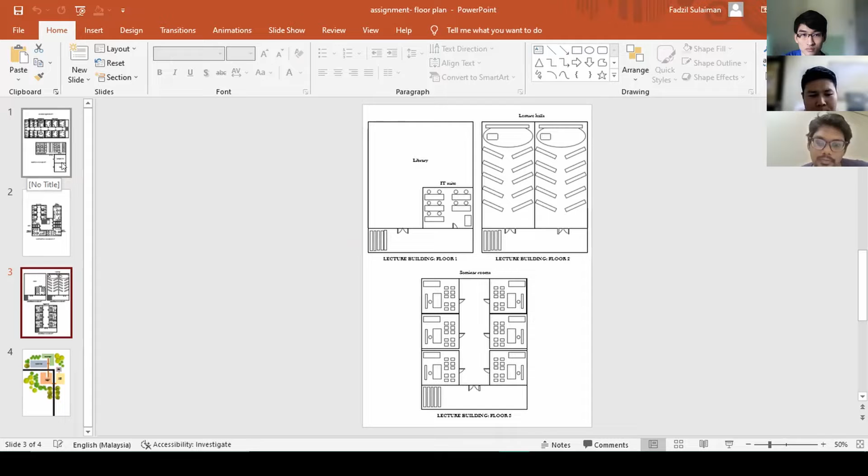So we start with the accommodation building. As you can see here, this building consists of 3 stories of the same floor plan.

We have provided 6 single rooms and also 6 double rooms for each floor. The total number of occupants for each floor comes to 18, and the total number of occupants for the whole building will be up to 54, which caters for 4 extra students.

We also provide a common room which can occupy up to 13 students at one time, and the kitchen, which can provide the required facilities for cooking for 6 students at one time. So the total number of occupants for the accommodation building goes up to 54 students.

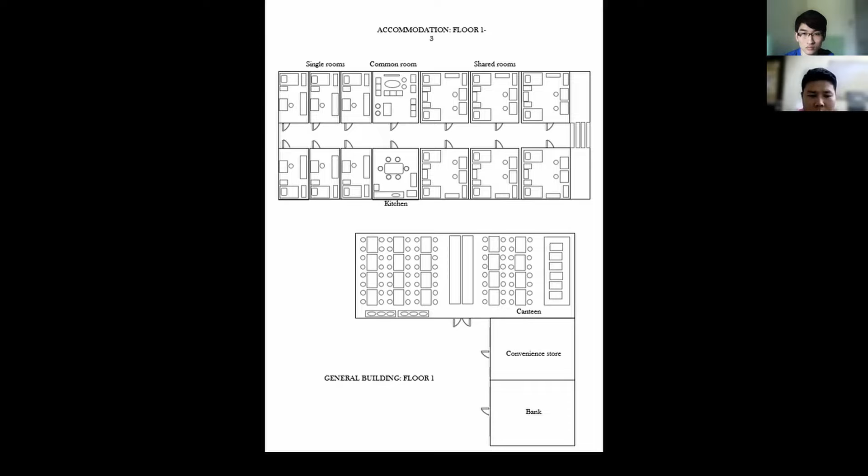Next is the laboratory building, which has 4 stories of the same plan. Here we provide 6 office rooms for the researchers, and also 3 main laboratories, which are physics, biology, and chemistry. Each laboratory can occupy 8 researchers at one time.

So the total number of researchers that can occupy the office rooms goes up to 24, and for the laboratories, the total number of researchers for the whole building can go up to 96.

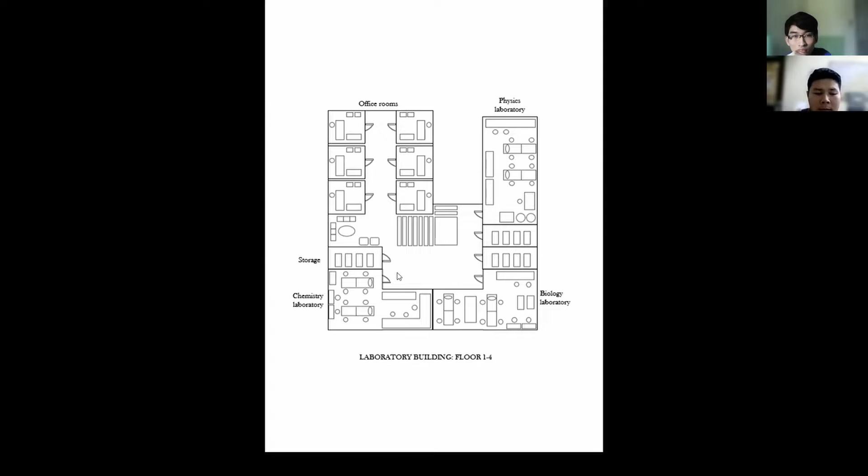Next is the last building, the lecture building. The first floor consists of the IT suite, which can occupy 10 researchers at one time, and behind here we have the library.

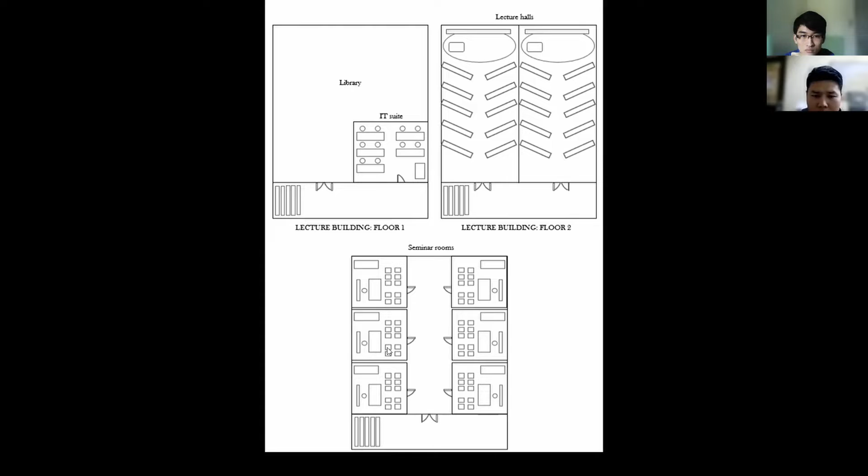Next we have two main lecture halls, each can occupy up to 50 students and one presenter, and lastly the seminar room on the topmost floor, which can occupy up to 30 students at one time. So this is the arrangement of all four buildings.

We put the accommodation and general building close together, with the main road crossing through the whole campus. Here we have the laboratory building, and opposite it the lecture hall. All buildings are connected by walkways since they are within walking distance, and one main road crosses through the whole campus while keeping the biodiversity of the site intact.

As we can see here, we do minimal land clearing for the campus. That's all from me. Do you have any questions? No, not for me so far.

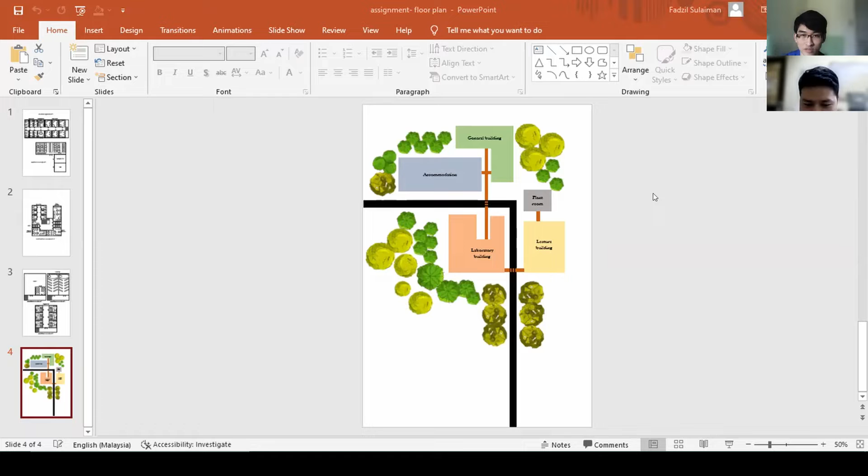About the energy production, our main requirement for the project is to let the campus self-sustain in energy and have a low impact on the nearby environment. Before going on to the design of the energy production system, let's look at the energy consumption of the campus first. Our client has provided us with the energy consumption of the facilities on their main campus and their historical consumption.

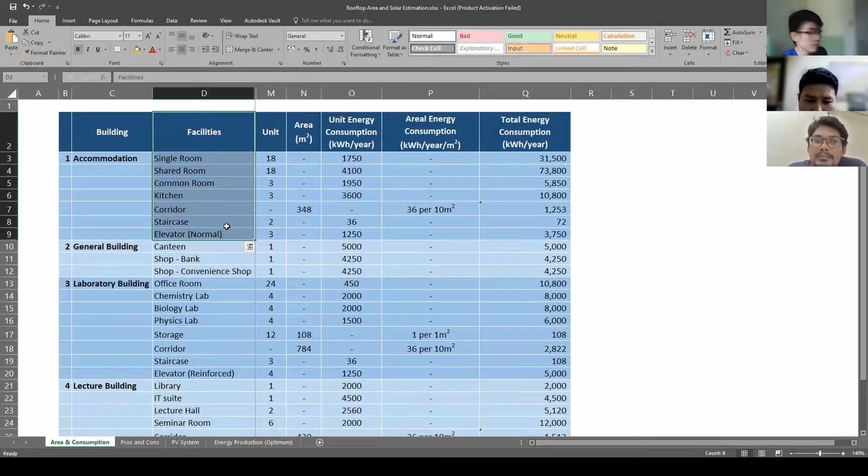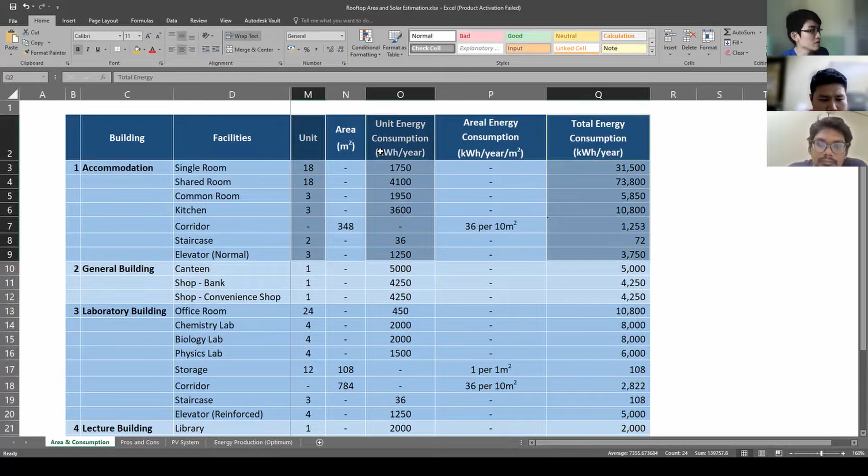Based on the facility list provided by Fadzil, I have estimated the total energy consumption for the campus. We know the unit and area of each facility, so using the data from the client, I multiplied the unit by the unit energy consumption of the facility to get the energy consumption, and did the same using the area of the facility when unit data wasn't available.

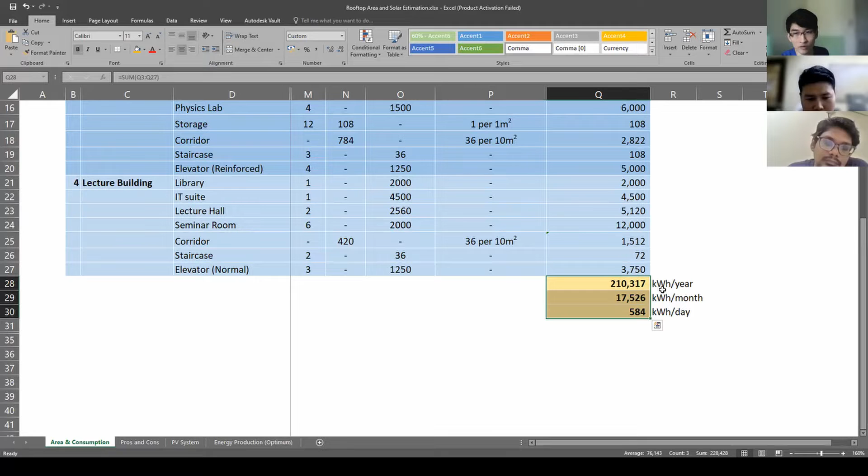After this calculation, what I get is the campus will consume about 210,000 kilowatt hours per year, equivalent to about 580 kilowatt hours per day. With this energy consumption figure, we can go on with the design of our energy system.

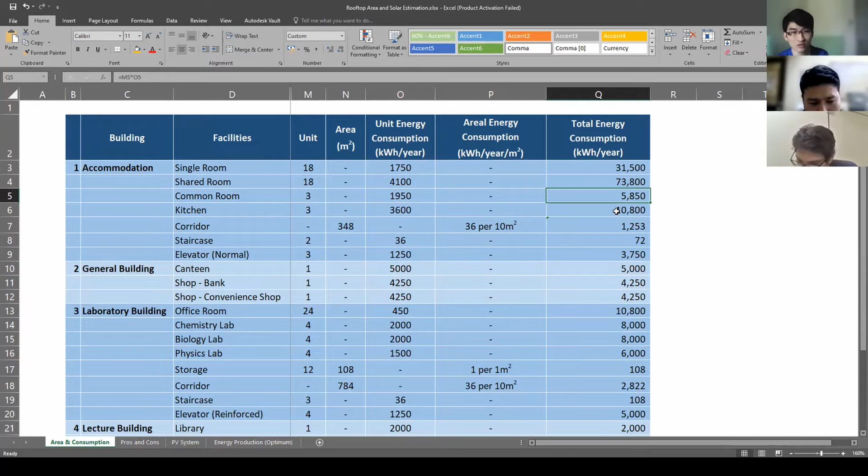Our client has provided us with the technologies they suggested: solar, wind, biomass, radioisotope thermoelectric, and geothermal. After our department discussed this, we would like to suggest using solar energy as the technology for our campus, because we analyzed their pros and cons based on environmental impact.

There are mainly four factors we looked at: emission during operation, whether there is waste generated during operation, whether there is noise pollution during operation, and whether the technology requires additional land clearance.

For emission during operation, quite a lot of renewable energy sources pass this criteria, with biomass as the exception. So we already excluded biomass from consideration because we need to put the energy generation facility on site, and the emission would affect the health of students and research scientists on site.

About waste generation, biomass and radioisotope have waste, others are okay. One important factor is noise pollution, because scientists and students need to study and conduct research on site, so we don't want any noise pollution. The only two technologies that pass this criteria are solar and radioisotope thermoelectric.

But then the last factor, since our client needs a low environmental impact, the only one that passes this criteria is solar, because solar can be installed on the rooftop, while others require additional land clearance. So our department would like to suggest we use solar for the technology on the campus.

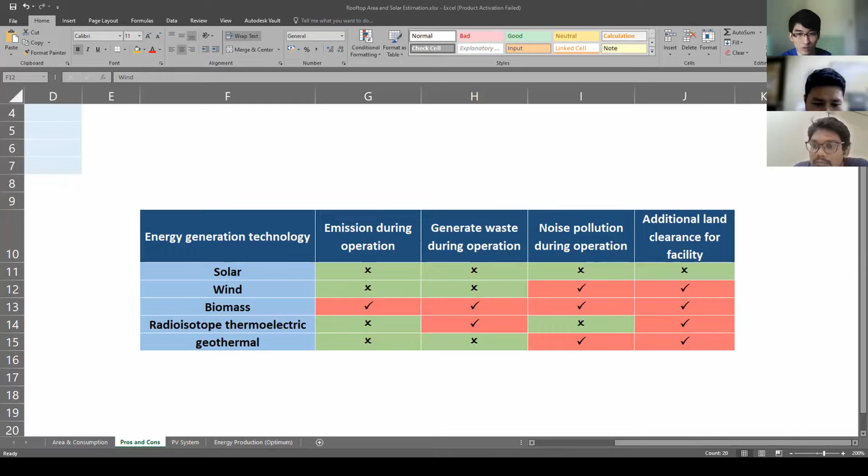Now that we've decided on solar as the main energy technology, I have a question for Fazil. When you showed the site map earlier, I want to ask whether the site orientation is already decided - for example, is it fixed, aligned to the north-south direction, or does it have some rotation? You see the screen, right? Yes.

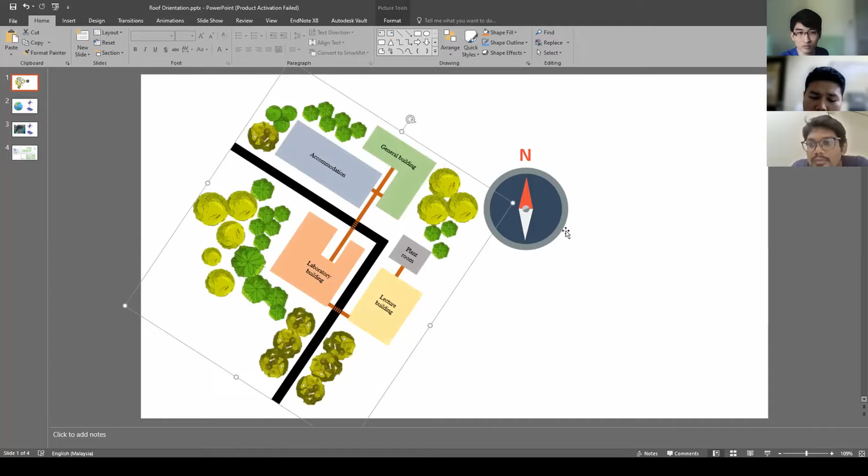Actually, we haven't decided on the orientation of the site yet. Great, so if I suggest some orientation, will it cause any trouble, or is it okay to change to any orientation? It's okay, yes.

And about the roof angle, what will be the roof angle used for the campus right now, and can we change it? That also we haven't decided on yet. Okay, then that's great.

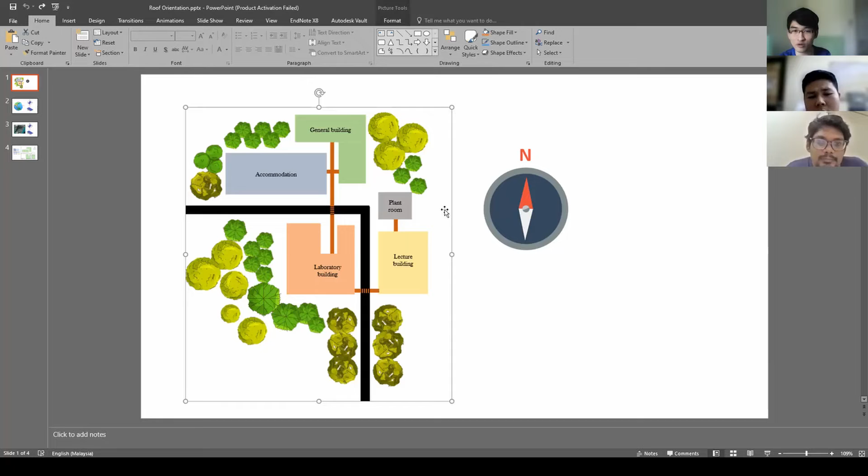I asked that because to optimize solar energy generation, I have some suggestions about the campus orientation and roof tilt. Let me briefly explain: if we want to choose solar as the energy generation technology, the orientation of the panel is actually quite important for energy production. There are mainly two things we need to consider, and the first is how the panel is rotated.

For example, this is called azimuth - that is how rotated the solar panel is with reference to the north-south line. The second consideration is how steep the panel is arranged, basically the angle of the solar panel. What we need to do is orient it at the optimum angle based on the site location.

A general rule of thumb is, for example, the site latitude. In our case, the site latitude is about 22 degrees, so our tilt will need to also be arranged to 22 degrees.

If you are okay with it, I suggest leaving the roof flat so we can set up some racks to tilt the solar panel. Another suggestion is to make the whole campus align to the north-south line, basically making the azimuth 0 degrees. You're okay with that, right? Later I can explain the details.

Yes, I agree with this, and this is such a brilliant thing to consider when we are deciding on the buildings. Okay, right.

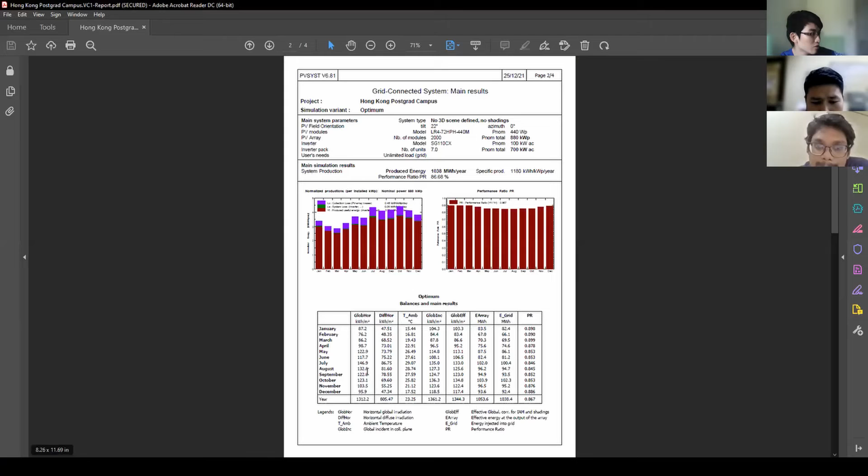So based on that, the rough design for now is our solar system will follow the north-south line, and the panels will be arranged at a 22-degree tilt. Our department has conducted a simulation report based on that, and this will also address Feng Yang's question just now.

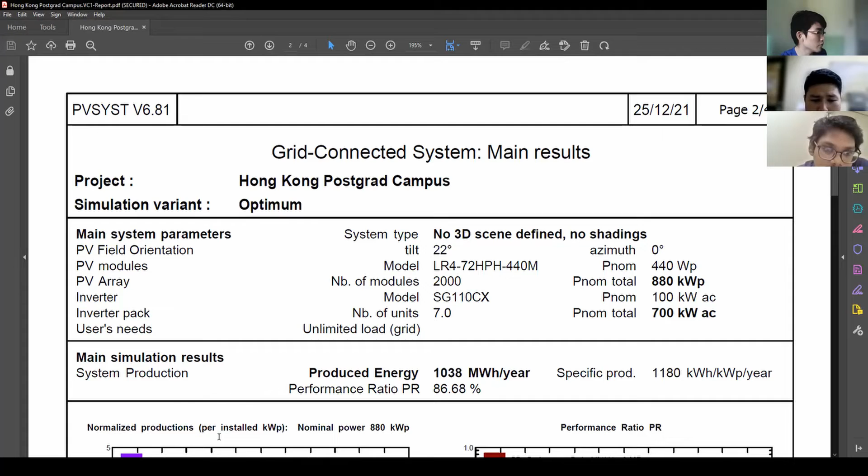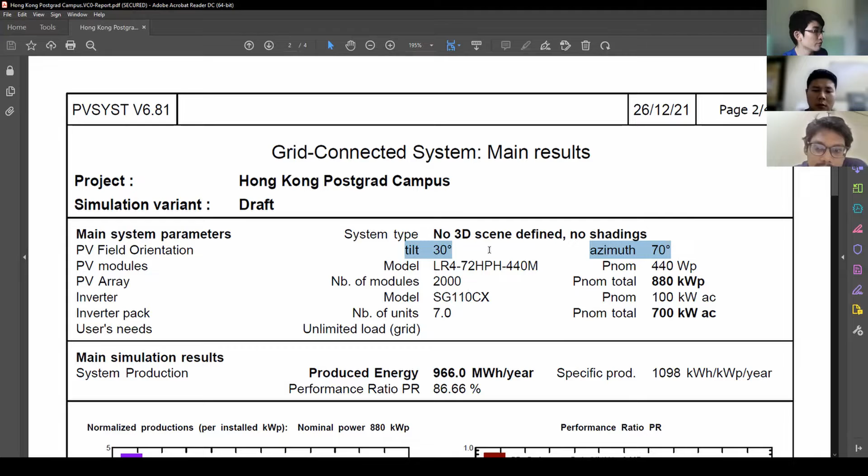Based on the simulation report we've done, you can see I have two reports ready. One is the optimum angle, the other is an example of a non-optimum arrangement. The first one has the panel arranged at a 30-degree tilt and 70 degrees away from the north-south line. The second report is the optimum angle: 22-degree tilt following the site's geographical location and latitude, with azimuth 0 following the north-south line.

The result we can see here is when arranged in a not-so-optimum way, you can see the bottom left graph, which is basically the energy use of the solar system. Compared to the optimum one, the optimum arrangement will have a higher generation.

Based on our report, after optimization we are able to generate 72,000 kilowatt hours more in yearly generation. That is basically equivalent to 4 months worth of the campus energy consumption.

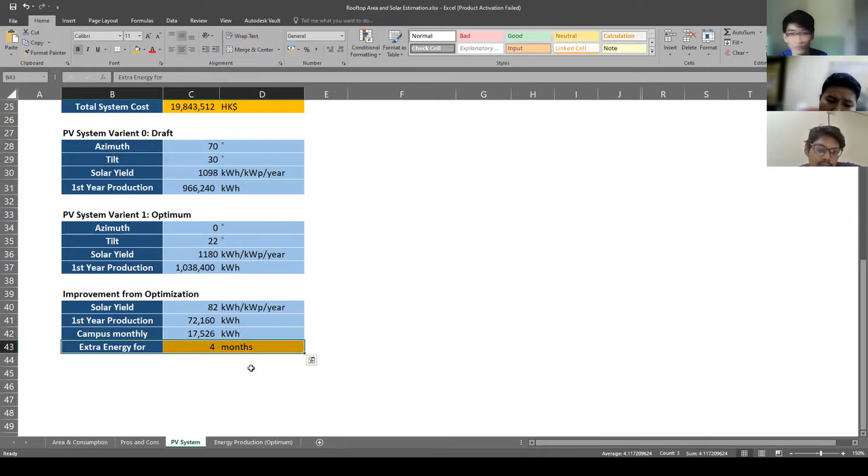So the final system I would like to suggest is basically this optimum orientation. After I did the simulation report, my estimate is that the energy production for our system will be a yearly production of about 1 million kilowatt hours.

And the campus annual consumption is only 210 thousand kilowatt hours per year, so it is more than enough to support the campus consumption.

In the graph here, you can see the pale blue color is our solar system output, and the dark blue one is the campus consumption. So the system will have no problem supporting the campus consumption even after 30 years. The slope of the graph is because of the degradation of the system, which our department takes as 0.6% — according to the data sheet of the equipment we use, it's a 0.6% annual degradation.

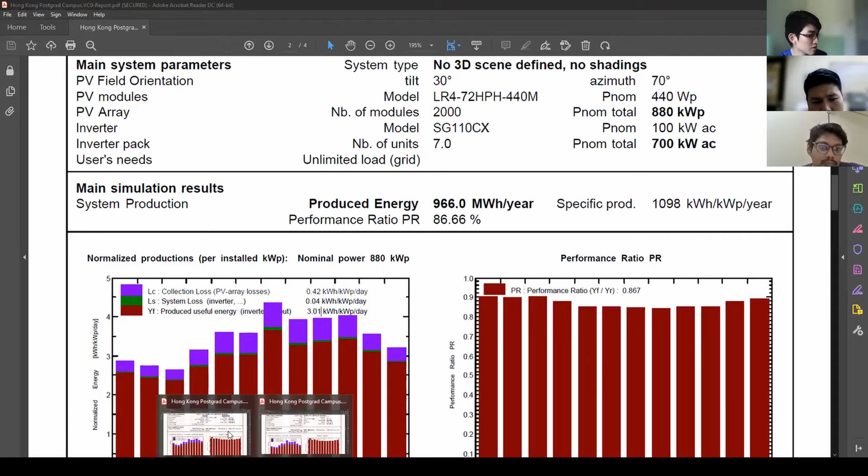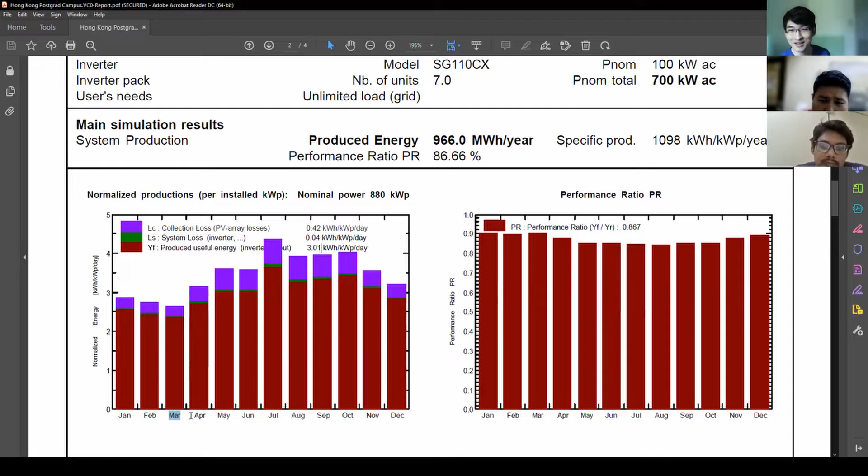About Feng Yang's question just now — the windy and rainy seasons are reflected on this graph. The minimum output is in March, and we've done some calculations on this. We don't have to worry because even with the lowest output, we still have more than enough energy to support the campus consumption.

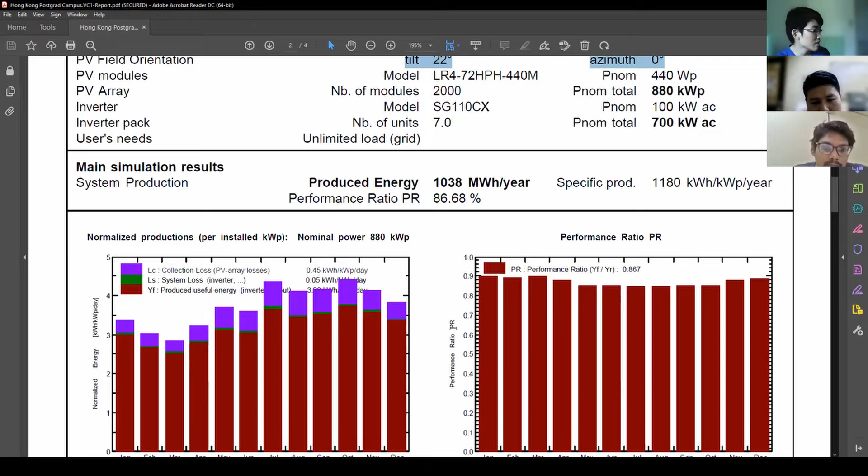So I think that's it for my part. Is there any question for now? No question.

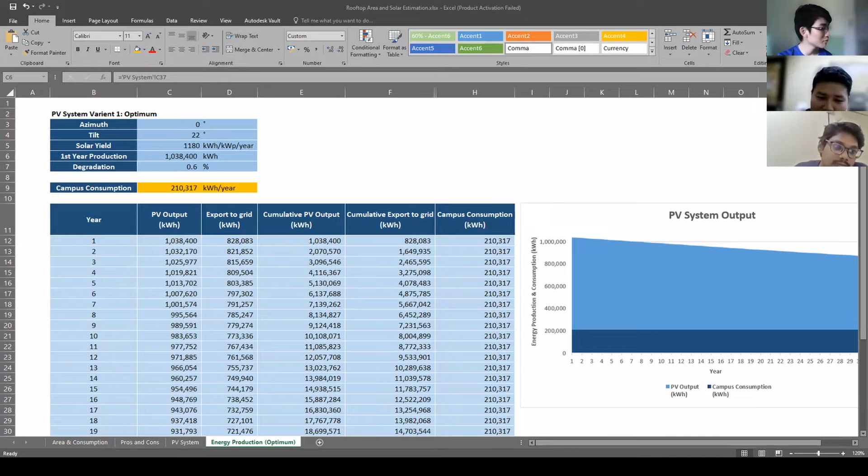I think you know that at night there is no light, like low lighting conditions. How does this solar system work then?

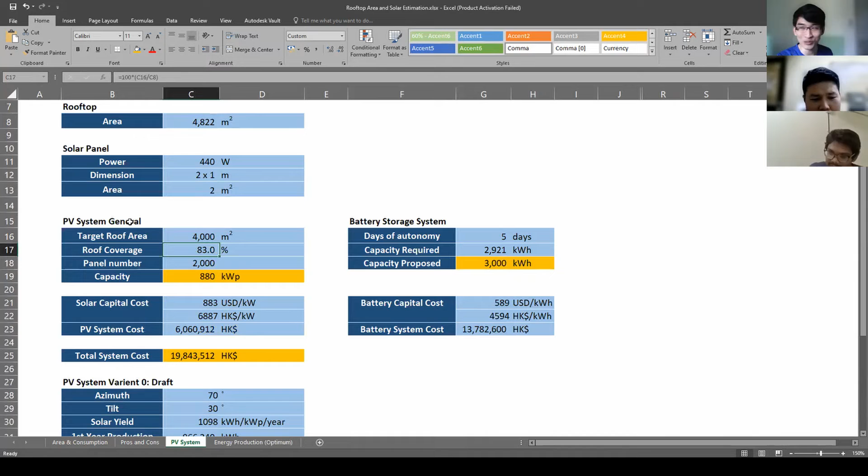Oh right, sorry, I forgot to mention — to support the system, yes, sorry about that, I forgot to mention that. That is a totally valid point. The solar system won't work at nighttime.

So we also included a battery storage system for that. The battery capacity we plan is able to sustain the campus consumption for 5 days, and the capacity of the battery will be about 3,000 kilowatt hours.

So if there's no lighting or low sunlight, we can still hold for 5 days, right? Yep, based on the forecast, there's plenty of energy available.

I think that is a wonderful design for the solar system. Okay, any more questions on the energy generation part? No question. Okay, then I think we can move on to the next part, the financial analysis.

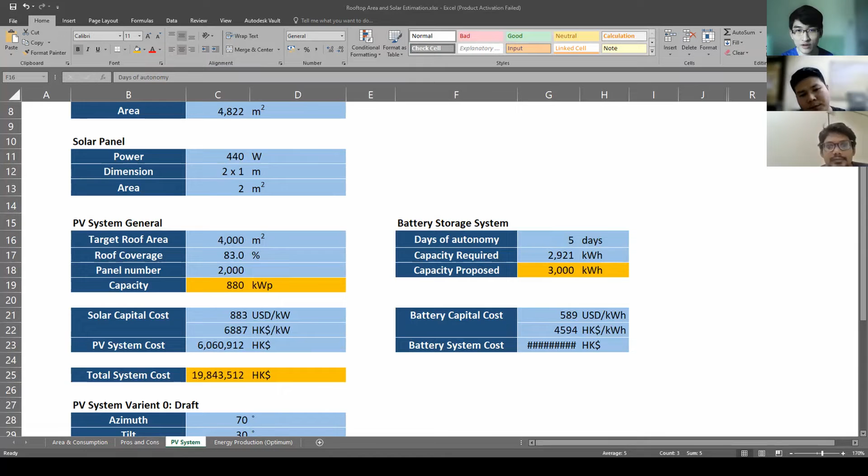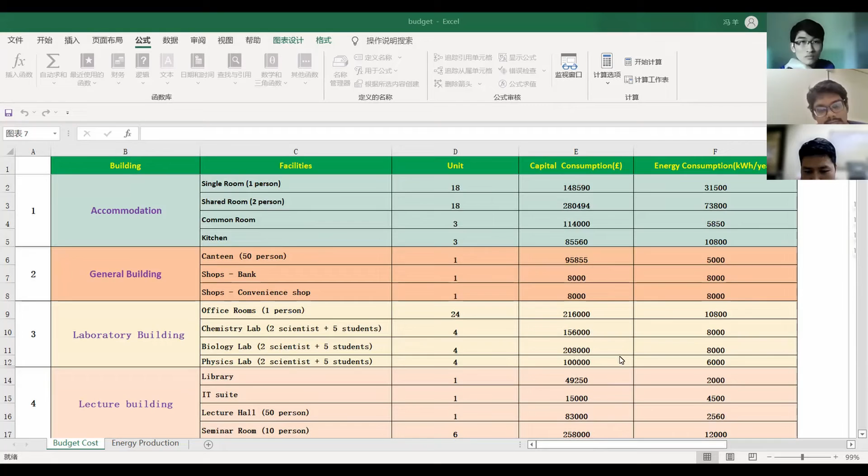Okay, this is the whole budget for campus building. We can see that they are including all the facilities about accommodation and general building. We can easily see the whole cost may be these values, and the whole requirement for energy may be these values.

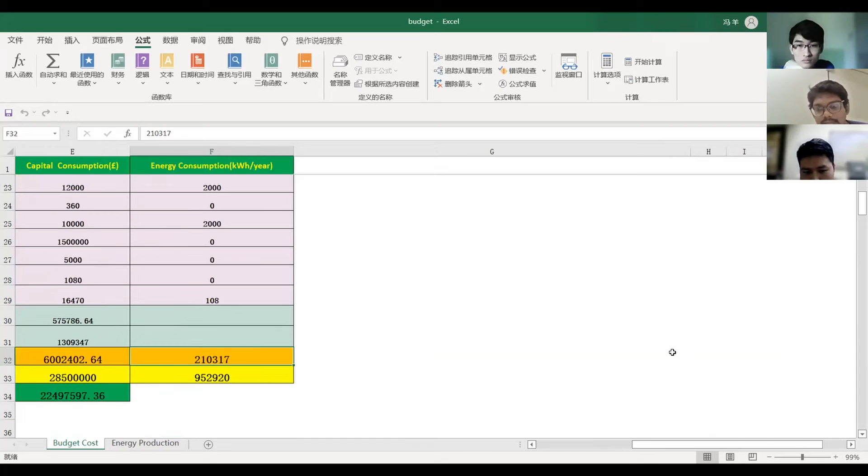I also see the second peak value to be the solar system, because we have to bring some green energy and also cost saving, so we choose the solar system.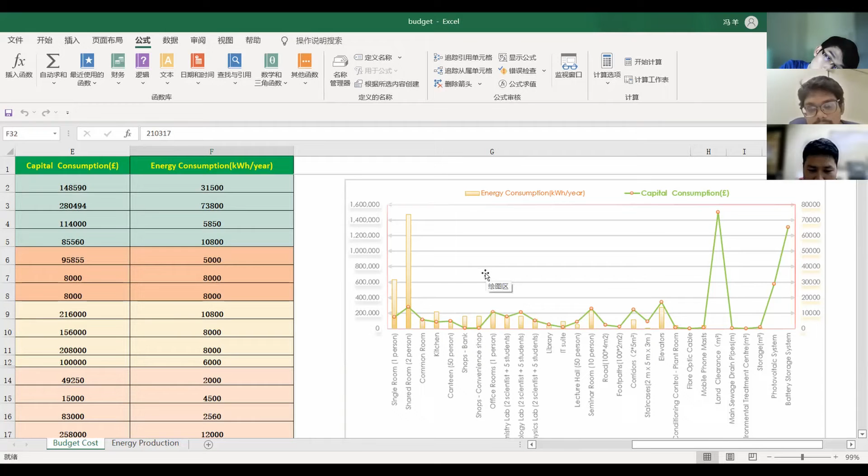And if we look at the energy consumption, we can see that the peak value could be the shared room, because you have to supply enough room for nearly 50 students. After that, we can see this one.

Let's look at this photo. You can see this is capital consumption, and this one is our requirement for campus building. This one is for our budget for campus building. We can see that we have enough money after we finish this campus building, and we also have enough energy.

This is the energy requirement per year if we want to support our whole campus system functioning well, and this is if we use the solar system, we could produce this energy. This means that we have enough energy, so we may make some sale to earn more money.

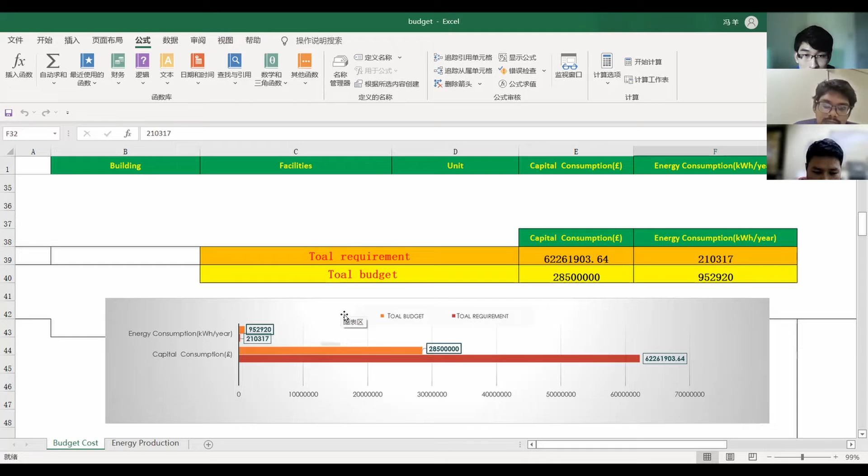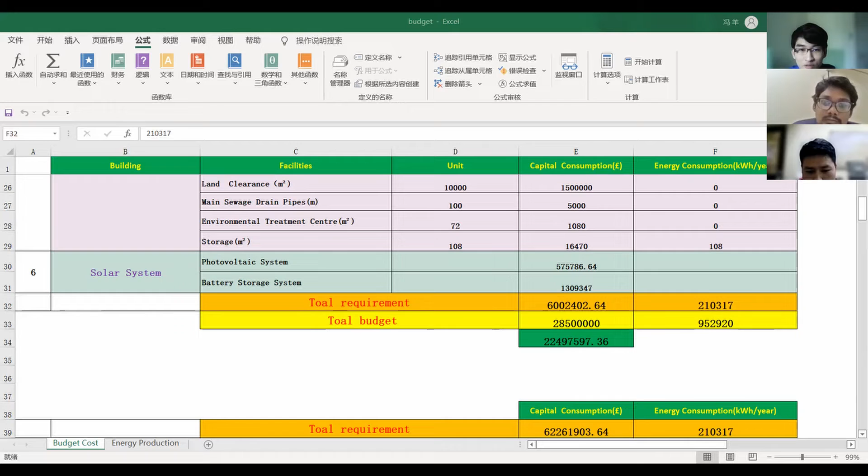Do you guys have any question about the budget? Our client did give us some budget, but do they give us enough budget for this project? They also need to try to achieve savings as much as possible, right?

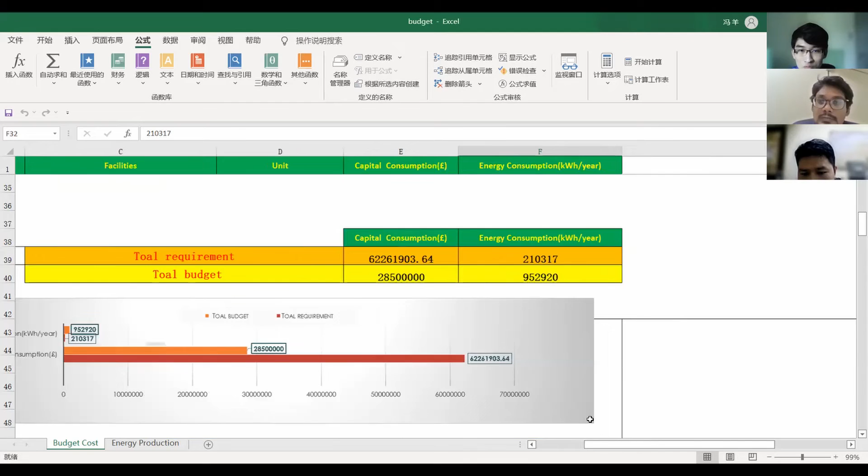So after we do the financial analysis, did you find any way to help the client recover some costs? Yeah, I have searched some information online. I chose one company as an example.

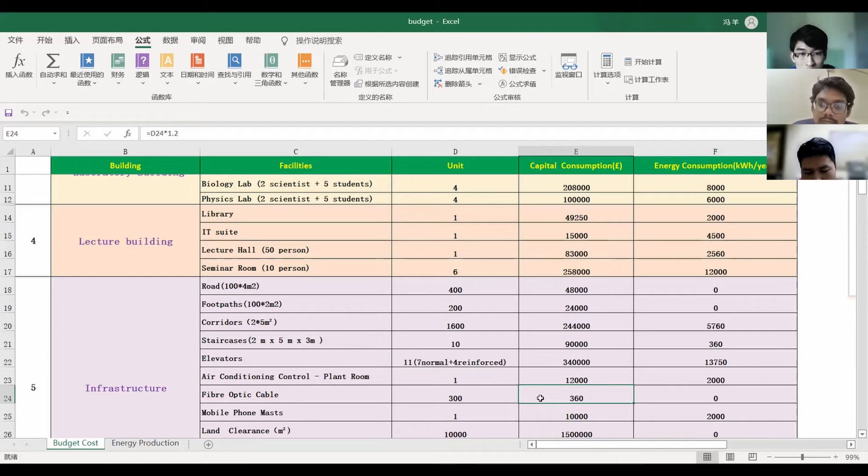Maybe the biggest electric company in Hong Kong - they have a policy for feed-in tariff. I will show you. Can you guys look at the feed-in tariff scheme?

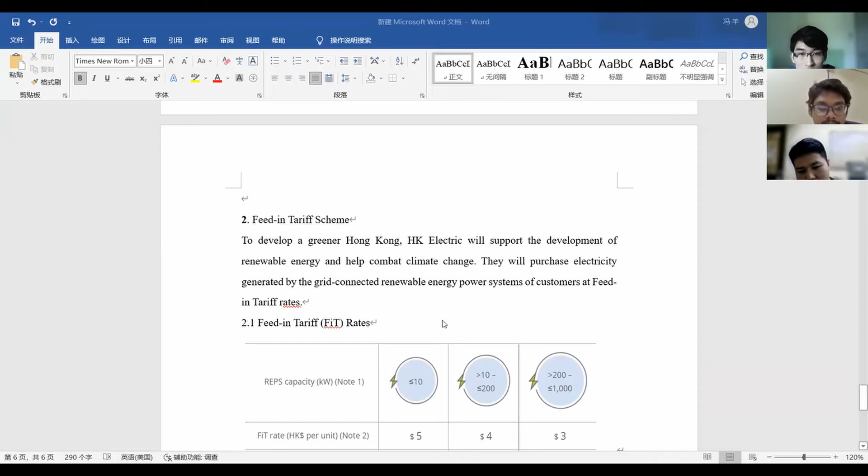Yep, now we are looking at it. This is from the Hong Kong Electric Company, maybe the biggest company in Hong Kong that supplies electricity for residents. We can see this is the price for selling electricity or energy. Because we have excess energy, since we just built the solar system, we can sell some electricity to this company. Considering our capacity of solar system, we could choose the $3 price for our calculation. Later I will show you the calculations.

So our excess generated energy can sell back to the Hong Kong government, is it? This right, Hong Kong - we may, but I'm not sure still to the Hong Kong government or this Hong Kong Electric Company. Oh, company, maybe we choose. We may sell directly to this company, maybe government may handle some administration or something like that.

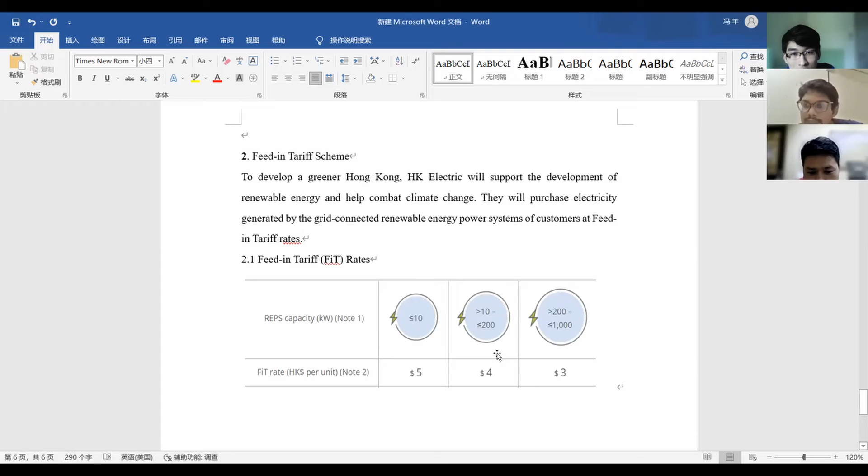I will share another - could you see the Excel? Can you see? Oh yeah, for now, yes. Sorry, I'm not familiar with this. Okay, let us continue.

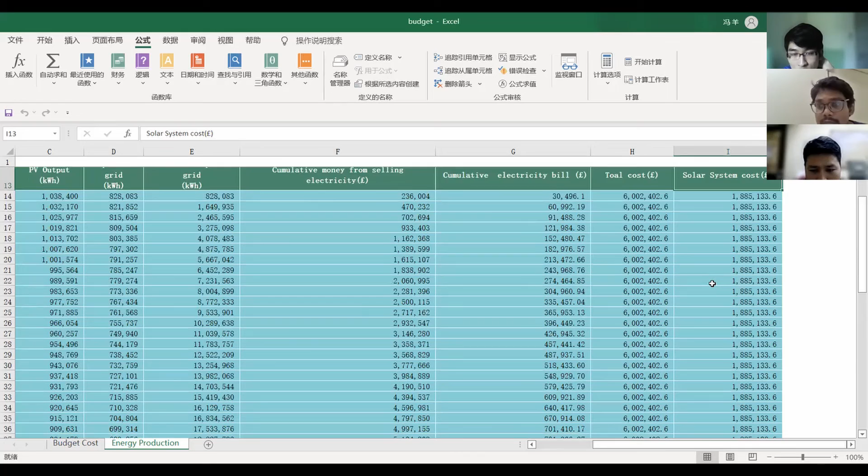The solar system cost already includes both the solar and the battery, right? Yeah, you can see this total. This is the solar system cost, already including the battery storage and the building for solar system. And the total project cost is all the construction cost plus the solar system cost, right? Yeah, the whole cost is all of it.

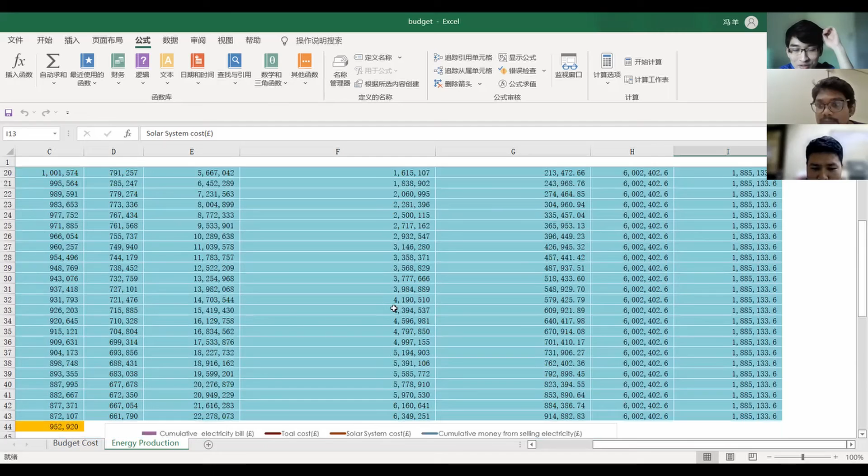So they just need 29 years to get back all the investment? We need around 29 years - we can earn back all the money we cost for this campus building, but we just need 8 years for the solar system cost to earn back the money. So I think solar system is worth building. That's not bad - for 8 years to return all the investment for the energy system and 29 years for the whole campus, I think that's good. We can propose this to the customer.

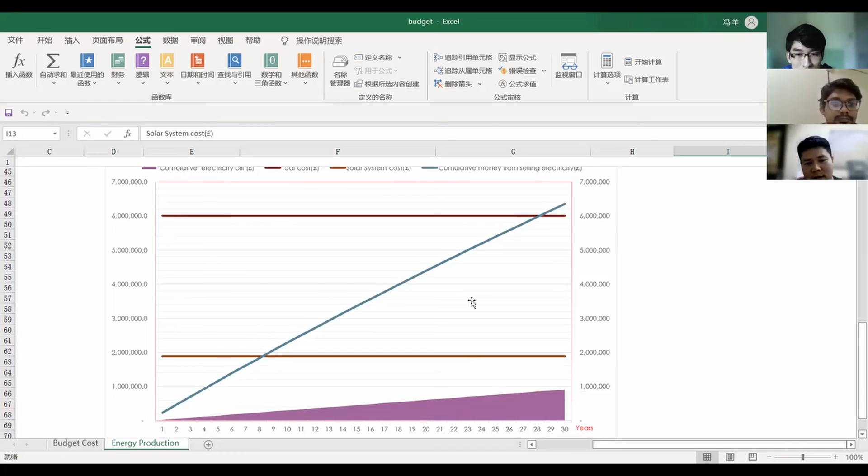So any questions for guys? No from me. No from me. How about Fadzil? Okay, no.

Okay, that's nice. So next we can go to the carbon emission analysis. Is Fadzil part?

I'll start sharing my screen. All right. So after we've gone through the budget analysis, now we will look into the carbon emission analysis to see the environmental impact of our project.

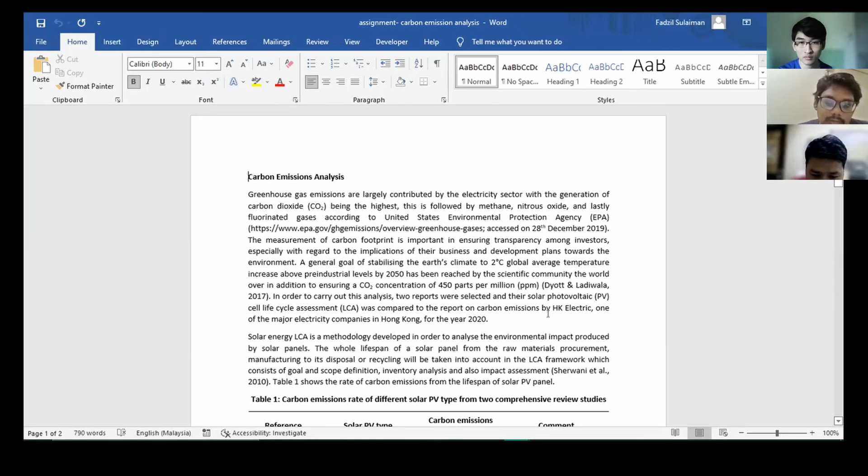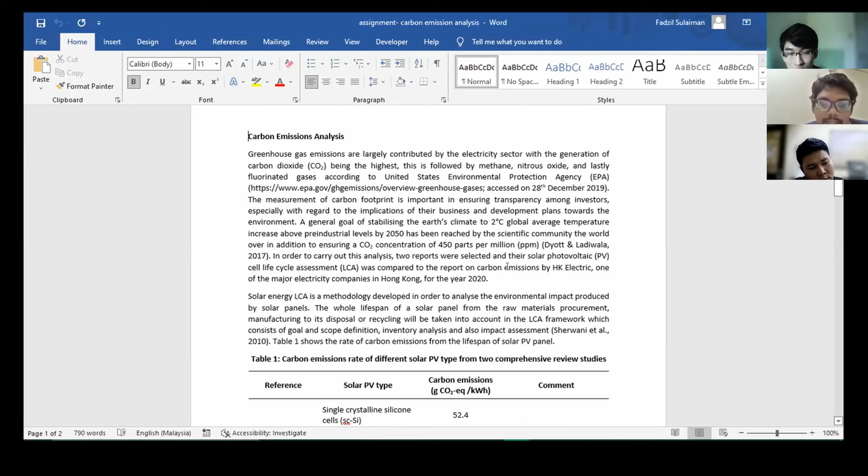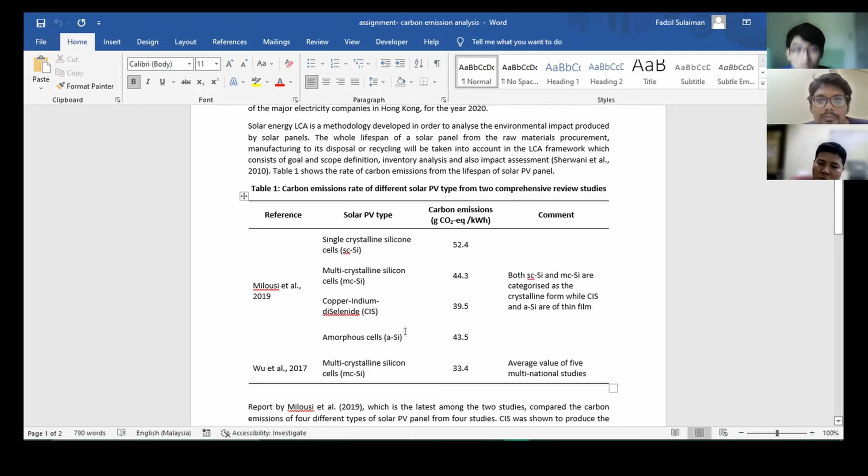To the ecosystem. For this, we will look into the solar energy life cycle assessment of different solar photovoltaic panels reported previously in literature and compare that to the carbon emission from the HK electric power grid in Hong Kong. To brief through, solar energy LCA is a method developed to analyze the environmental impact produced by solar panels across their lifespan, from raw material procurement, manufacturing, to disposal, to account for the carbon emissions generated.

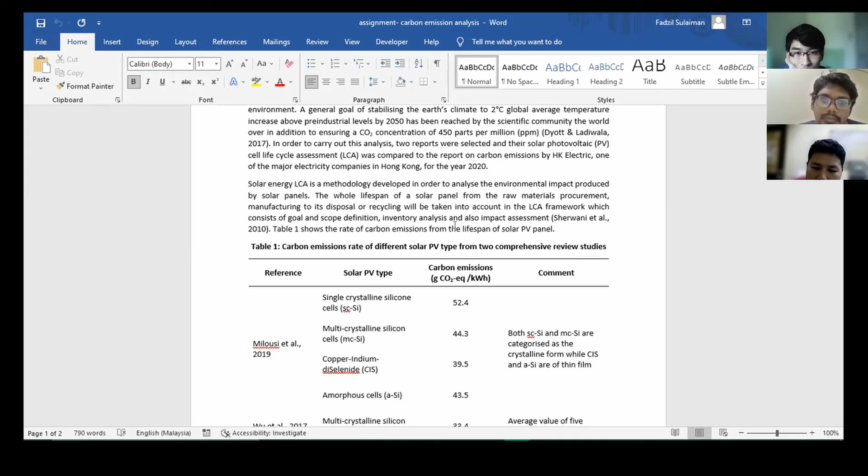For this, I have gone through two pieces of literature. The first one is a more recent one by Milousi et al, and the second is from 2017 by Wu et al. This first paper differentiates the carbon emission from the LCA of different types of solar PV: single crystalline silicon, multi-crystalline silicon, copper indium diselenide, and amorphous cells.

These two are considered thin film, and these are crystalline. The second paper only compares the multi-crystalline silicon cell of the solar PV from five multinational studies, so it only shows one type.

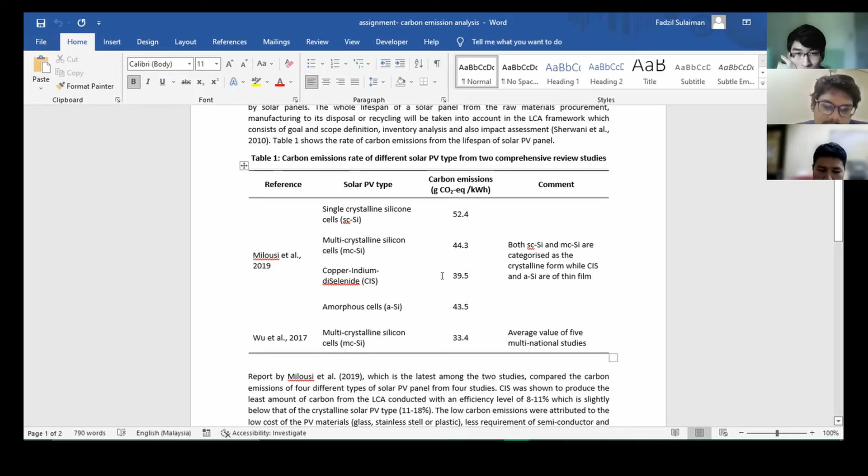From the first paper, we can see that the CIS type produced the least amount of carbon compared to all four. However, its efficiency level is not as great as the others, about 8 to 11, compared to the crystalline type which is 11 to 18.

Since we only have MCSI in common between the two papers, we have to compare the carbon emission from MCSI in the first study with that of the second, which is about 33.4 to 44.3. The first study has a slightly higher value than the second.

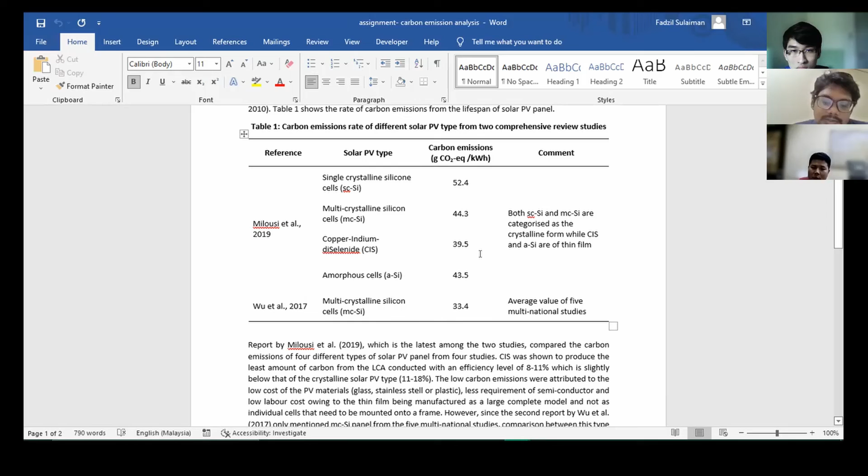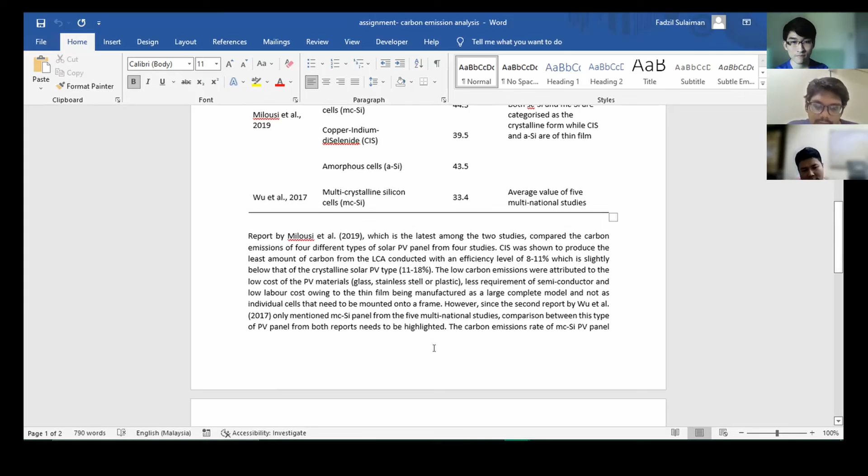However, the second study takes values from 5 different reports, and the amount varied a lot. From there, I calculated the standard deviation and found it to be very large, at 18.97.

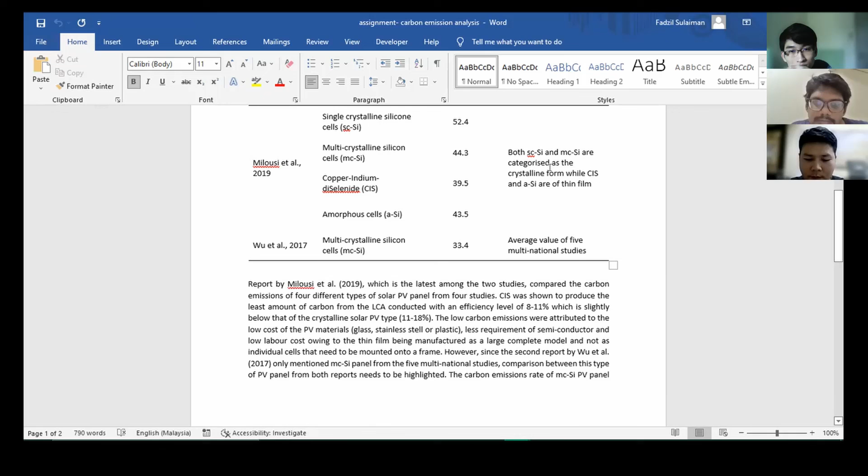So I think we should look into the carbon emission from these more recent studies. And then the second part is we have to compare the carbon emission from the LCA assessment with that produced by the HK Power Grid in the year 2020, the most recent report.

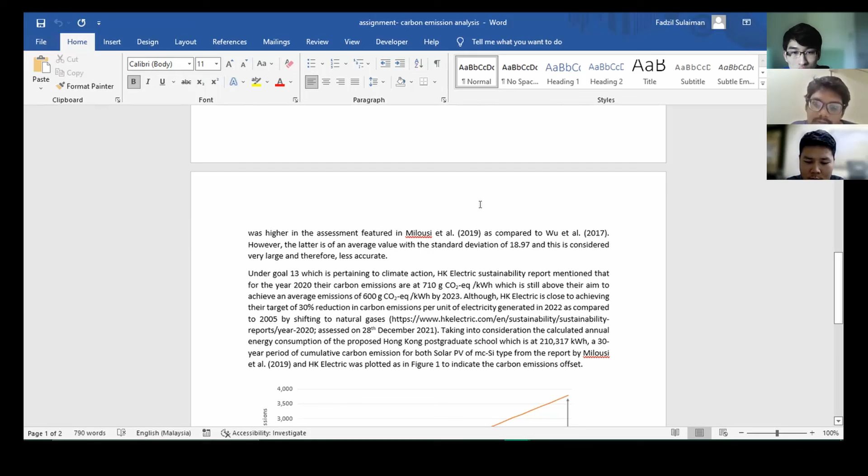I've gone through the sustainability report of this company and found that they produce close to 710 grams of carbon emission per kilowatt hour, which is slightly above their average aim of 600 grams.

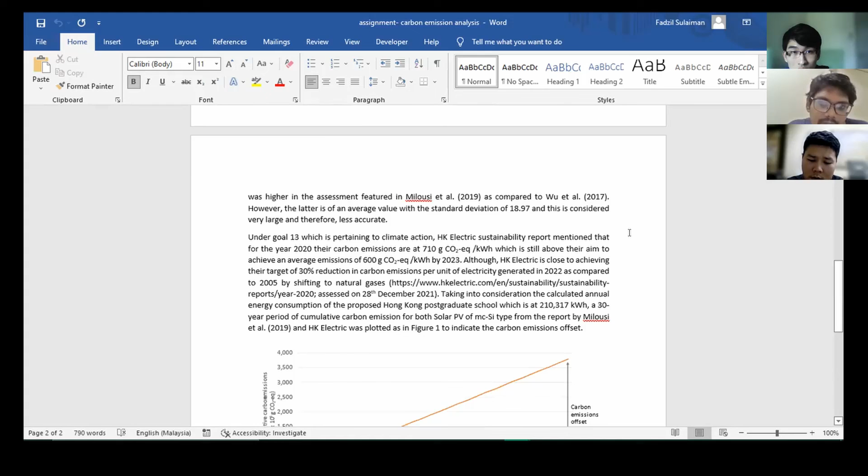Taking these two values, before I proceed with the rest, I would like to ask the engineering team which of these types will be considered for building the solar panels on campus, according to the report?

For now, what we've picked for the design is multi-crystalline silicon.

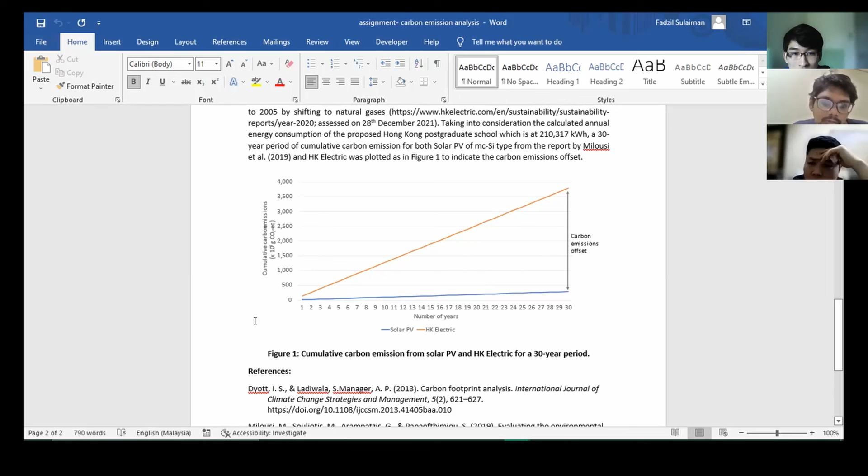All right, so I'll take this value from the MCSI, multi-crystalline silicon, and compare that with the carbon emitted by the HK Grid. Here, over a 30 year period, you can see there's a very large carbon emission offset from both. This shows the cumulative carbon emission from the solar PV and also the HK electric power grid. So, anything to ask?

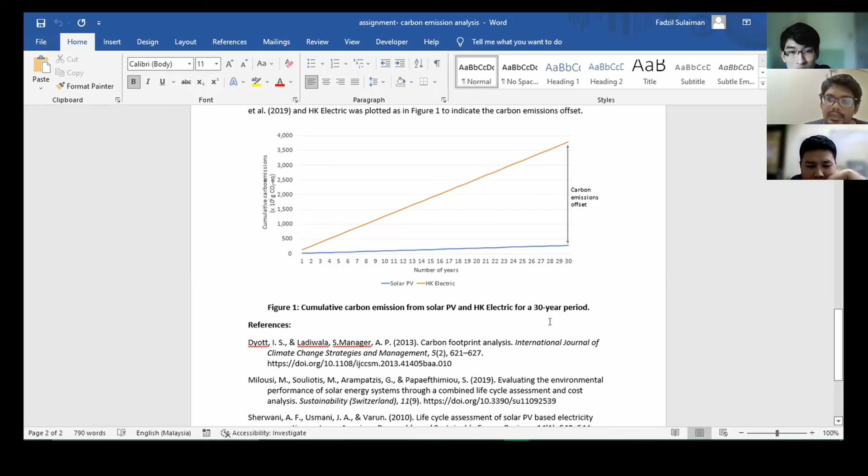No, for now. Great, okay. Not yet. That's all from my report on the carbon emission.

Okay, so let's see whether we achieve. I think we've gone through all the departments' reports. So we have gone through all the department reports, and now the project requirements of supporting the population, providing accommodation to students, self-sustaining energy production, minimum impact to the nearby environment, and saving energy costs in the long term — I think our planning so far has achieved all the project requirements.

Yeah, I think that's good. So if there's nothing else to add on, I think we can proceed to prepare a report to our client, and then we can stop our meeting for today.

Is there any question else? Anything else? No. Yeah. No, no question. All right, good. Then we can proceed with preparing the report.